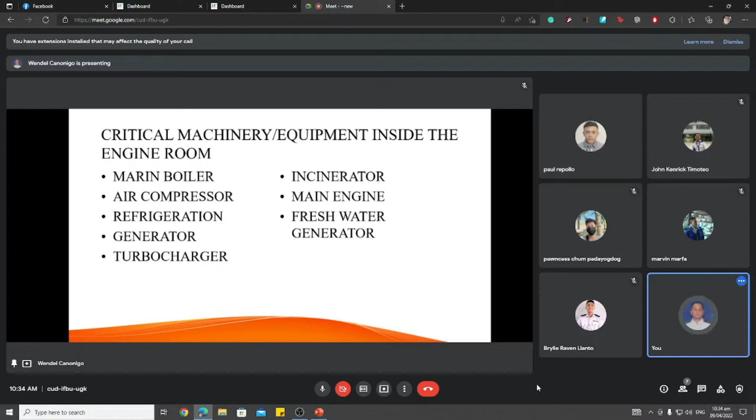Critical importance: boilers are one of the essential equipments on board ships. Its purpose is to provide heating to the main diesel propulsion engine and to the bunker FO tanks, to make it less viscous for transfer purposes as well as easy ignition.

During that time, boilers were used to perform all the major functions that propulsion and power generating systems currently do. With the development of technology, various types of machines perform important tasks on ships. However, an advanced boiler is still an important part of the engine power plant and cargo operations.

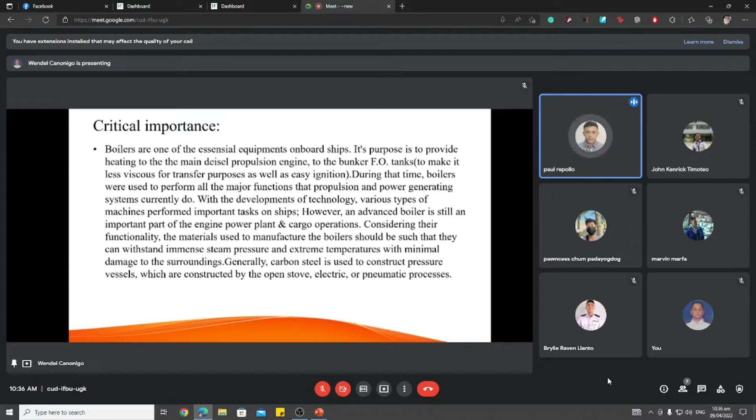Considering their functionality, the materials used to manufacture the boilers should be such that they can withstand immense steam pressure and extreme temperatures with minimal damage to the surroundings. Generally, carbon steel is used to construct pressure vessels, which are constructed by the open stove, electric, or pneumatic processes.

Marine boiler spare parts: flame detector, auxiliary and primary low water cutoff switches, high pressure and high temperature cutout switch, pressure control device, water level device, safety relief valves, fuel safety shutoff valves, high and low gas pressure switches, combustion air switch, gas regulator, igniter parts, gaskets, boiler level, sight glass and sight glass packing.

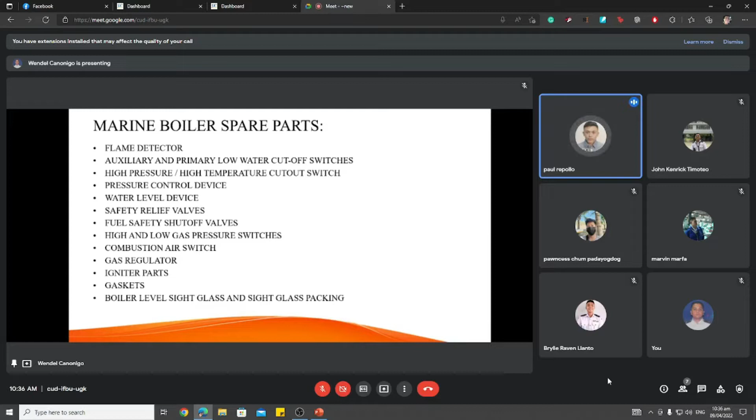Air compressor. The critical importance of this air compressor is that the main engine marine air compressor acts as the power source for starting primary and auxiliary engines.

The main marine air compressor stores pressurized air, so it can be released when the engine starts. This compressor is typically high capacity since starting the primary and auxiliary engines requires a significant amount of power.

Ship air compressors can serve multiple functions depending on their locations on board. Marine air compressors are generally divided into four categories: main, deck, emergency, and topping up.

Deck marine air compressor. Deck marine air compressors are small and portable for maximum mobility. This mobility allows them to serve a variety of functions on the deck, such as operating power tools when making small repairs or completing cleaning and sanitation-related tasks.

In case of emergencies on deck, such as fire, a deck marine air compressor can help operate a fire pump. Responding quickly to emergencies on a ship is crucial, as they could compromise the safety of the ship and the people on board. Emergency marine air compressors provide a backup power source in case of emergency. In a potential power failure, this compressor can provide the power necessary to operate the primary and auxiliary engines. Having at least one emergency air compressor on board is crucial to maintaining the ship's function.

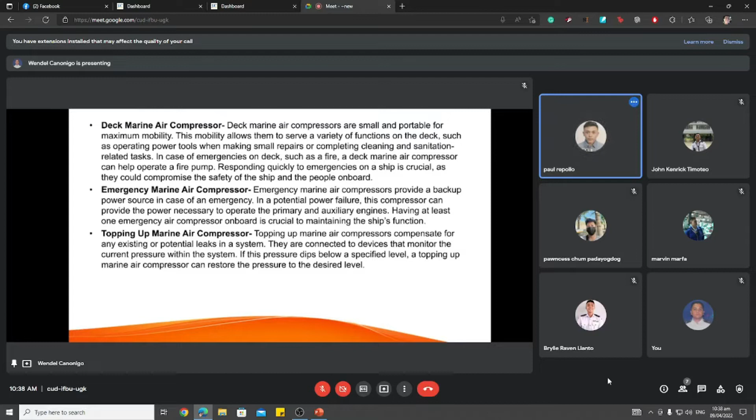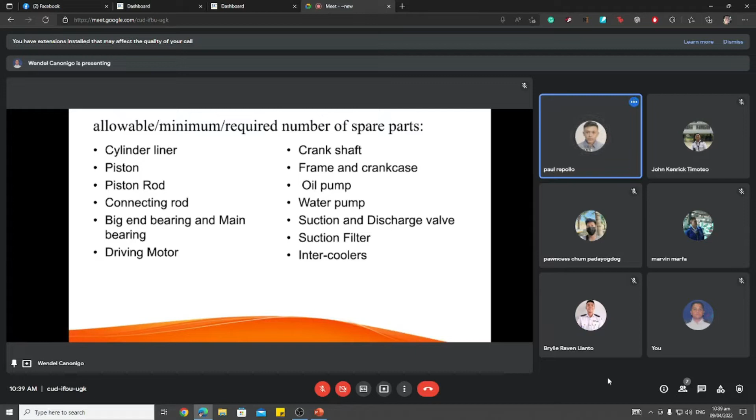Allowable minimum required number of spare parts: cylinder liner, piston rod, connecting rod, big end bearing and main bearing, driving motor, crankshaft, frame and crankcase, oil pump, water pump, suction and discharge valve, suction filter, intercoolers.

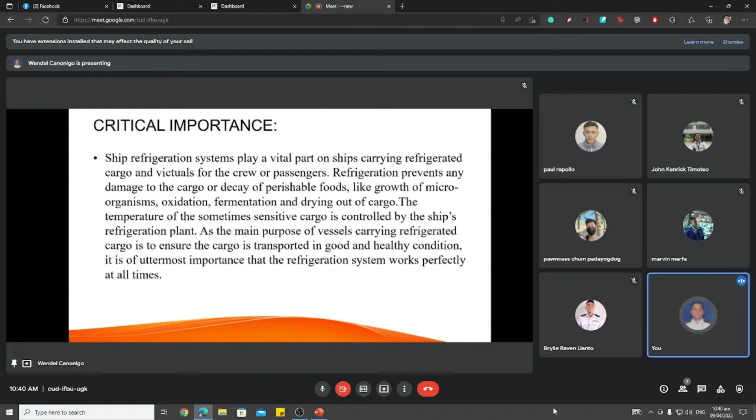The temperature of the sometimes sensitive cargo is controlled by the ship's refrigeration plant, as the main purpose of the vessel carrying refrigerated cargo is to ensure the cargo is transported in a good and healthy condition. It is of utmost importance that the refrigeration system works perfectly at all times.

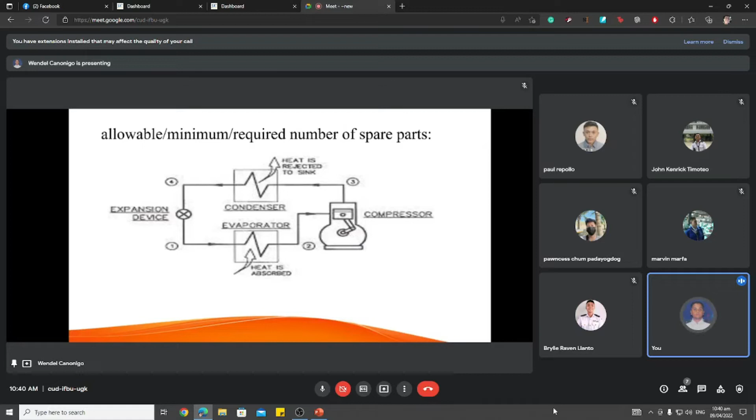Allowable minimum required number of spare parts: expansion device, evaporator, condenser, heat, compressor.

Generator. Critical importance of a generator: a generator on a ship is known as the heart of a ship. It is the lifeline which supports each and every connection function of the ship.

The generator of the ship requires special care, attention, and maintenance for its effective and economic run. Moreover, when it comes to operating a generator on a ship, it's a totally different ballgame. Unlike the conventional generators that we use on land, a ship generator requires a special procedure for starting and stopping it.

Though not a very complex one, the process demands a step-by-step system to be followed. Missing even a single step might lead to a failure in starting or stopping the generator, and can even lead to a blackout, a situation which everyone on the ship tries their best to stay away from. In this article, we bring you an accurate step-by-step procedure for starting and stopping a generator on the ship.

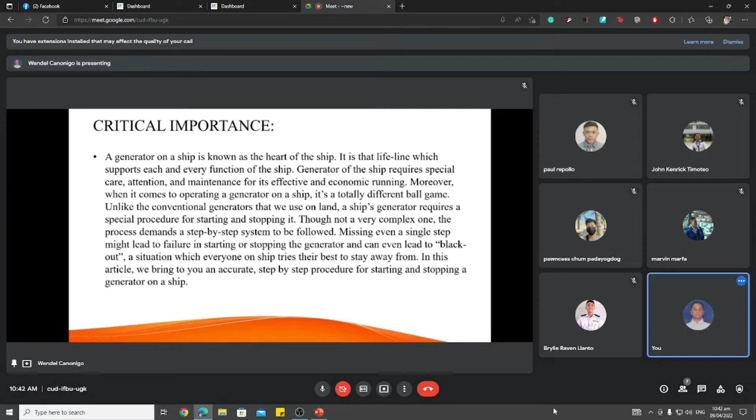Allowable minimum required spare parts: engine, alternator, fuel system, control panel, battery charger, voltage regulator, main frame or skid, lubrication system, diesel generator sets, natural gas generator sets, portable generator sets, marine generator sets, diesel engines, natural gas engines, marine engines, load banks, transfer switches, radiators.

Trailer, enclosure, natural gas generator sets, portable generator sets, marine generator sets.

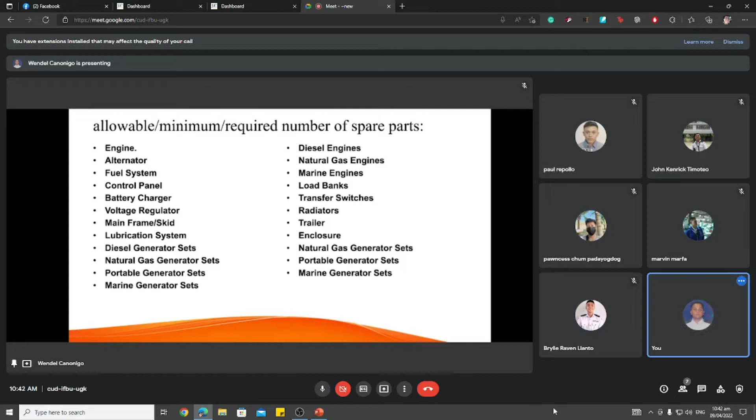Critical importance. Basically, a turbocharger is connected to an engine to give it more power. This allows smaller engines to put out more horsepower and torque than they ordinarily would. Turbochargers utilize the engine's hot expelled air to spin the compressor's wheel and take in outside air. This reduces the amount of waste produced.

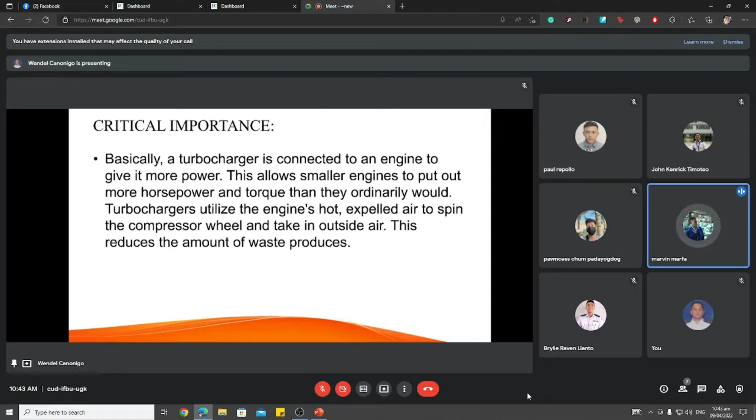Allowable minimum required number of spare parts: cartridge, fully assembled and balanced turbocharger cores, vacuum actuators, and pneumatic actuators. Electronic actuators, electric servo drives. Turbocharger repair kits, spare parts kit sets for quick minor repair. Shaft and wheels, turbocharger shafts with turbine rotors. Compressor wheels, turbocharger compressor wheels. VNT nozzle rings with nozzles for VNT.

Turbochargers, VNT geometry control nodes, nozzle ring, housing for VNT geometry control elements, bearing housings, cartridge housings, turbo core housings, back plates, turbocharger core plate from compressor side, heat shields, turbocharger core heat shields, gasket kits, turbocharger gasket kits/sets, VNT gasket, internal gasket for VNT turbochargers.

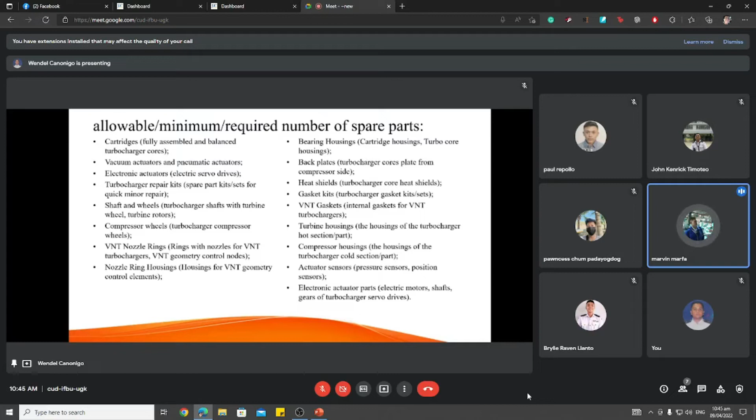Turbine housings, the housings of the turbocharger's hot section part. Compressor housings, the housings of the turbocharger cold section part. Actuator sensors, pressure sensors, position sensors. Electronic actuator parts, electric motors, shafts, gears of turbochargers, servo drives.

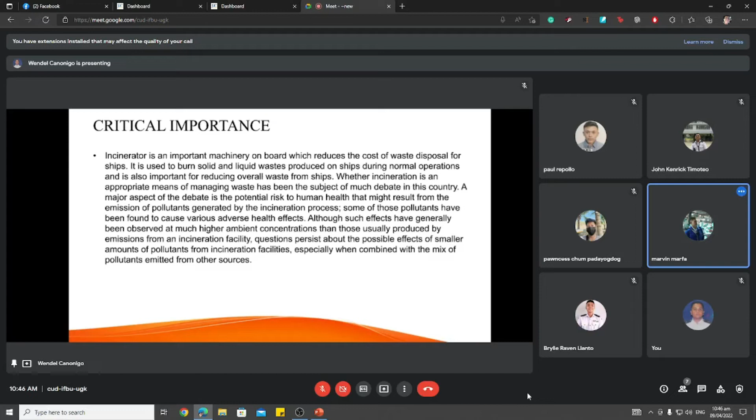Allowable minimum required number of spare parts. One year spare parts package for oil-fired versions. One year spare parts package for gas-fired versions. One year spare parts package for LPG fired versions. One year burner parts package for oil fired versions. One year burner parts package for gas fired versions. One year burner parts package for LPG fired versions.

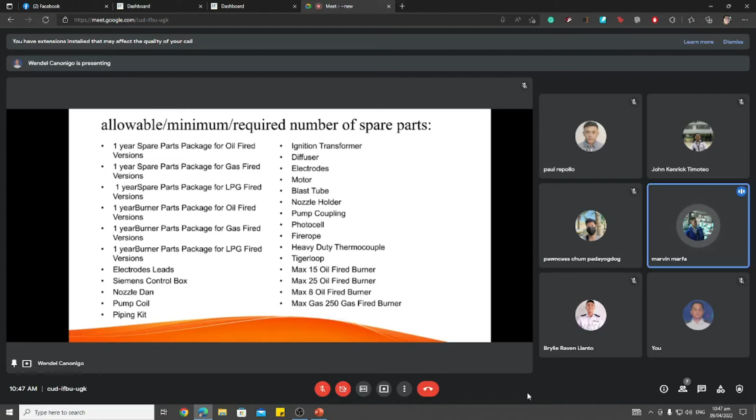Electrodes, leads, Siemens control box, nozzle Dan, pump coil, piping kit, ignition transformer, diffuser, electrodes, motor, blast tube, nozzle holder, pump coupling, photocell, fire rope, heavy duty thermocouple, tiger loop, max 15 oil fired burner, max 25 oil fired burner, max 8 oil fired burner, max gas 250 gas fired burner.

So next machinery is the main engine.

Critical importance. Main or propulsion engines are used to turn the ship's propeller and move the ship through the water. They typically burn diesel oil or heavy fuel oil and may be able to switch between the two. There are many propulsion arrangements for motor vessels, some including multiple engines, propellers, and gearboxes.

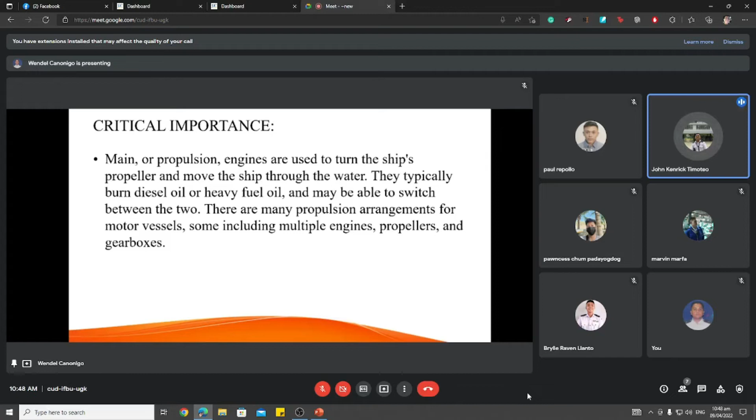Allowable minimum required number of spare parts. Spares number one: main bearings or shells, for one bearing of each size and type fitted, complete with shims, bolts, and nuts. Minimum one. Reason: critical spare, as failure on one of the units may also render the engine inoperable, and continuing to operate with damaged bearings may also cause permanent failure of crankshaft and moving parts, with consequential damages like crankcase explosion, etc.

Second part is main thrust block, one set. Reason: pads for one face of Michell type thrust block, or inner and outer race with rollers where roller thrust bearings are fitted. Failure in the thrust block could lead to seizure of the shaft, which can lead to loss of propulsion power.

Third spares: cylinder liner complete with joint rings and gasket, one full set. Reason: cylinder liner complete set shall always be ready to go. A cylinder liner crack, seizure, leaky rings, etc. are troubles which usually occur on the engines, and it is always desirable to keep as many as possible, but at least one full set is mandatory.

Fourth spares: cylinder head assembly, one full set. Cylinder cover complete with bolts, joint rings, and gasket. For engines without covers, the respective valves for one cylinder unit, cylinder covers, studs or bolts with nuts as applicable for one cylinder.

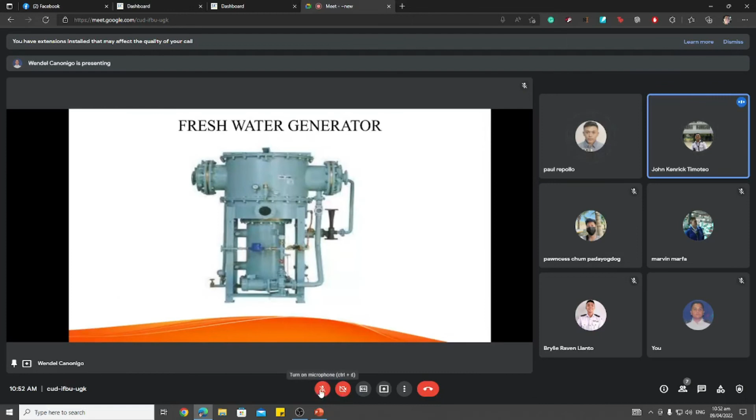Next machinery is the freshwater generator, of critical importance. Freshwater generator, or FWG, converts seawater or salt water to freshwater. Freshwater generators are a common sight on many marine vessels as they allow them to generate the fresh water they need while at sea. The process of generating fresh water is achieved via distillation.

There are three main methods employed for generating fresh water from seawater: boiling, evaporating, and reverse osmosis. Most marine vessels and industrial plants produce fresh water using either evaporators or RO plants. Large desalination plants may be connected to the steam circuit of a thermal power station, where steam is used to evaporate seawater.

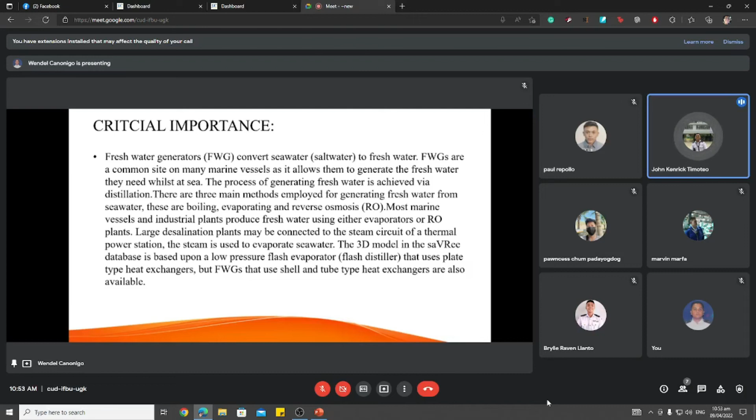The 3D model in the database is based upon a low pressure flash evaporator that uses plate type heat exchangers. But freshwater generators that use shell and tube type heat exchangers are also available.

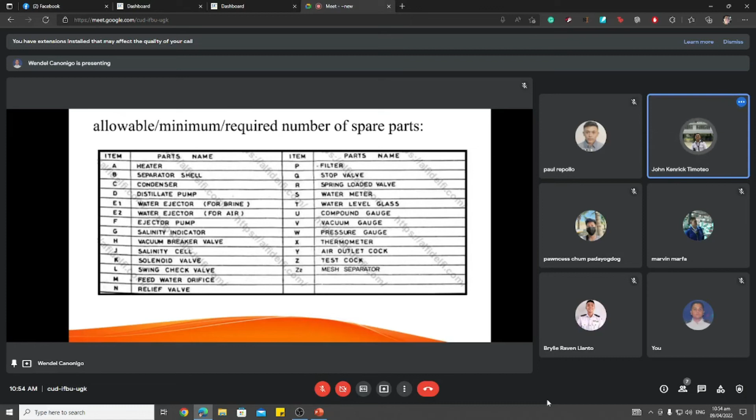Allowable minimum required number of spare parts. Items include: heater, separator shell, condenser, distillate pump, water ejector for brine, water ejector for air, ejector pump, salinity indicator, vacuum breaker valve, salinity cell, solenoid valve, swing check valve, feed water orifice, relief valve, filter, stop valve, spring loaded valve, water meter, water level glass, compound gauge, vacuum gauge, pressure gauge, thermometer, air outlet cock, test cock, and mesh separator.

Steering gear is of critical importance. This is the equipment provided on ships to turn the ship to the left, port side, or to the right, starboard side, while in motion during sailing. The steering gear works only when the ship is in motion and does not work when the ship is stationary. All ships are to be provided with an efficient main steering gear and auxiliary steering gear, and except for very small ships, the main steering gear should be power operated.

Manually operated mechanical steering gears were in use during the sailing days, and sailors with strong bodies were required to operate the steering gears.

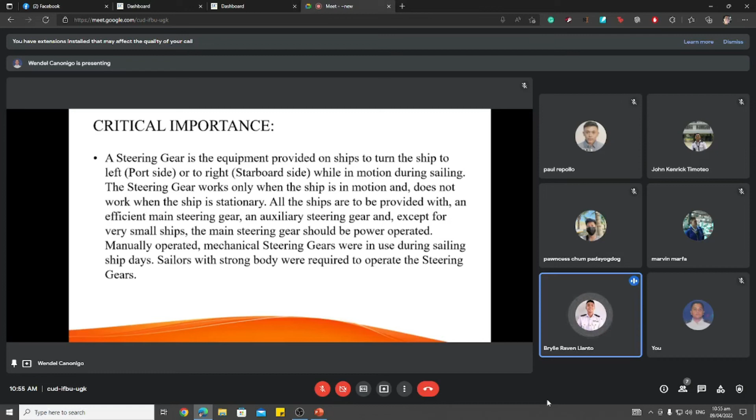Allowable minimum required number of spare parts. For the rotary vane type: internal seals, gland seals, thrust bearing, cover seals, bonded seals, liner. For the cylinder type: piston seals, V-packings, O-rings. For pumps: oil seals, ball bearings, couplings, flexible elements, filter equipment, packing, tank cover seals, control valves, solenoid valves, proximity sensors, and e-motors.

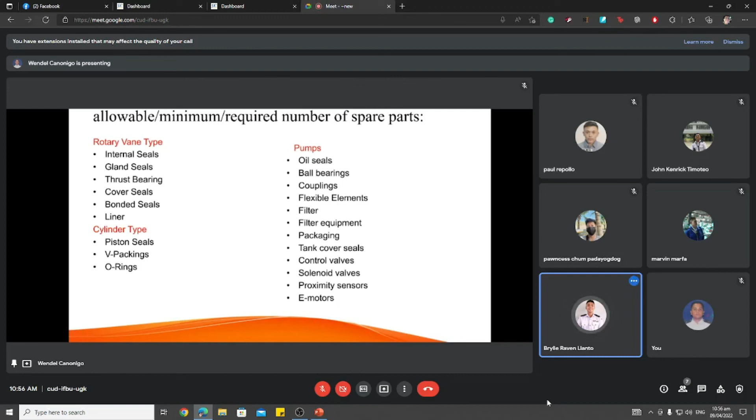For the electrical system: phase failure relay contactors, transformers, hour counters, alarm boards, rudder indicators, and rudder stock. That's all.

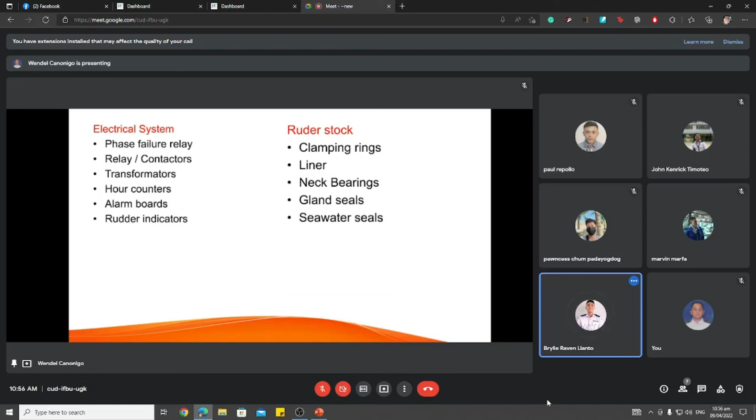Steam turbine, of critical importance. On ships, the steam turbine can also be used as a direct propulsion plant, in which the turbine shaft is connected to the propeller shaft of the ship. Since the speed will be in the thousands of rpm, a reduction gear and reduction system are used to get a drop in propeller rpm. The propelling plant of the ship can be driven by steam turbine through a slow-speed motor. The turbine generator directly supplies power to these slow-speed motors, which are connected to the propeller shaft of the ship.

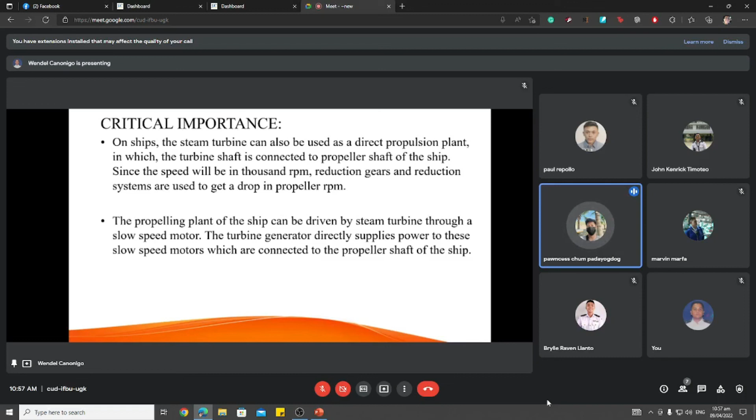Allowable minimum required number of spare parts. List of minimum recommended spare parts of auxiliary steam turbines driving electric generators for essential service of ship for unrestricted service. Item: turbine shaft spare part, carbon sealing rings fitted with spring for each size and sealing ring type of gland, for one turbine. Number recommended: one set.

Number two: filters, strainer baskets or inserts for filters of special design, of each type and size. Number recommended: one set. Notes: the availability of other spare parts should be specially considered and decided upon by the owner. It is assumed that the crew has onboard the necessary tools and equipment. When the recommended spares are utilized, it is recommended that new spares are supplied as soon as possible. Where the number of generators of adequate capacity fitted for essential service exceeds the required number, spare parts may be omitted.